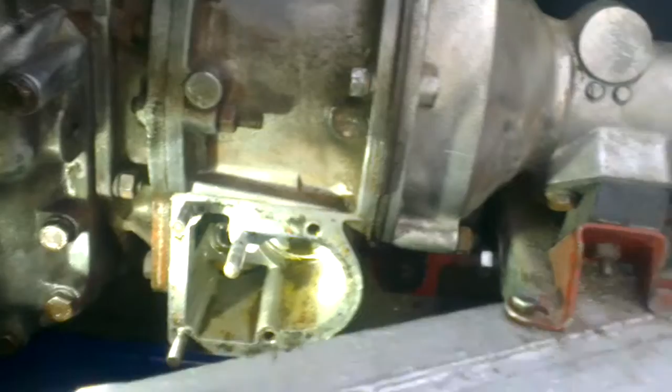This is the gear; the overdrive part is in here and has a planetary gear with one level. The overdrive connects when the fourth gear is engaged, which you can inject with this switch, and if the rotation speed is injected high enough. It is simple but it works.

The overdrive gear operates over a pressure of the two cylinders which are in here. In addition, the gear has an oil pump.

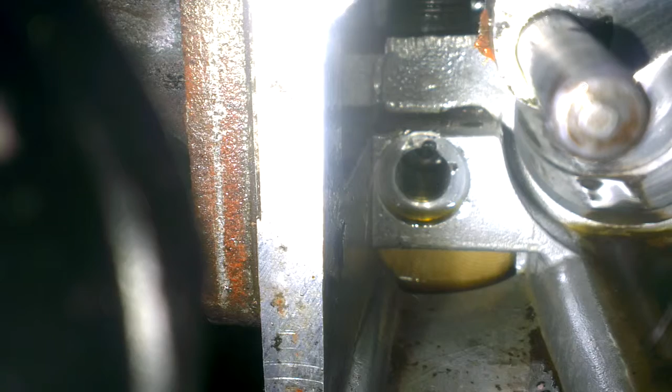If you put a bit of effort in the lighting, you can see that in the back the pump goes up and down. This is a simple stick, a piston in a cylinder, which eventually has an eccentric, which will be driven in the gear over a roller and goes up and down.

Of course, this is energized with oil, and technically the oil is being compressed when it goes down and comes out at this point where the hole is. But there is a canal in which the oil goes further in and will be pushed into the main chamber, and comes out at the main chamber if everything goes right.

The hole at the front is normally tight because of this siphon, which goes in and out by every oil pressure. Because of that, the oil only goes in one direction but doesn't run back.

This is closed over a ball, this here. The ball sits inside and closes the canal. At insertion, the ball will be inserted by a sledge to assure the perfect hold. The oil pushes out the cylinder when it arrives.

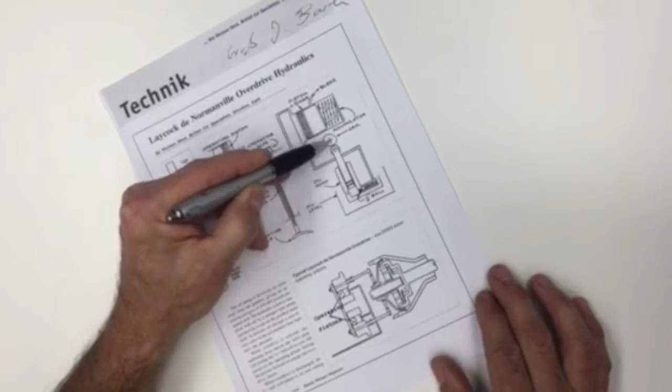These are the detailed parts of the Healey overdrive hydraulics. This is the plunger oil pump, which will be going up and down by the shaft of the gearbox. There is an eccenter and the plunger is going up and down.

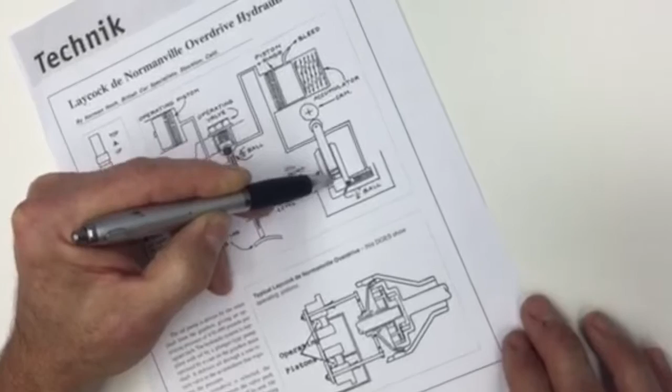At each stroke, this ball will go inside, pressed against the spring, and the oil will go this way to the piston.

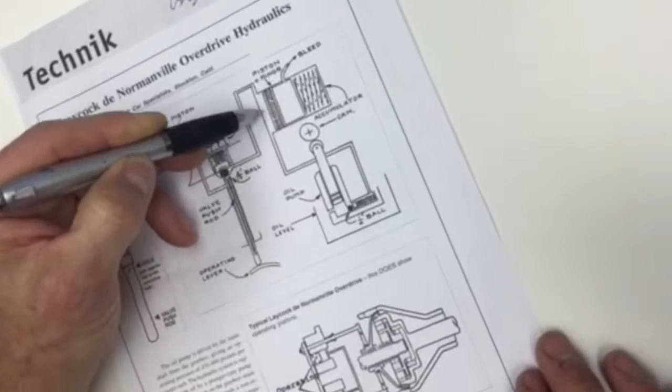And at each stroke, this piston will be compressed against this spring inside of this tank.

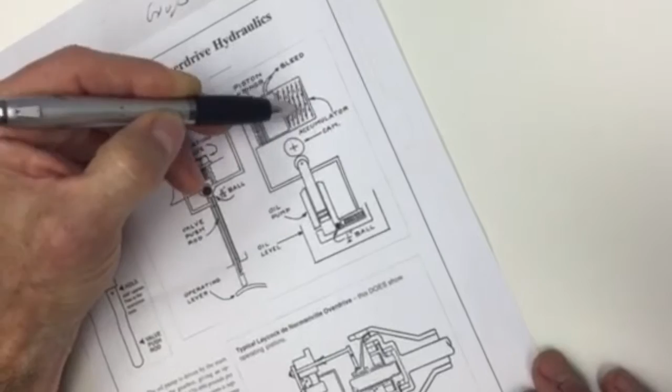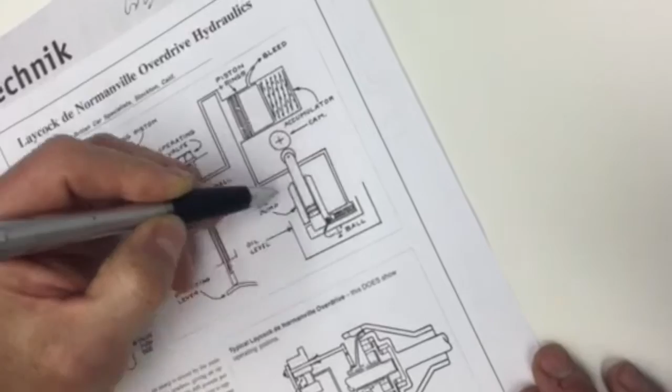If this ball is not fitting well into the seat, the pressure will go out of the tank in the wrong direction. So it is very important to check the seat of the ball.

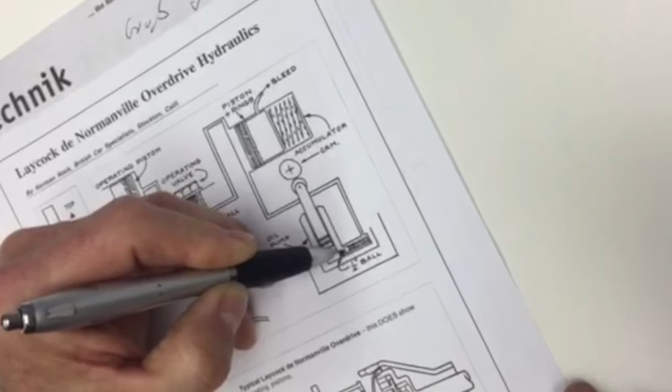The size of the ball is 1/4 inch.

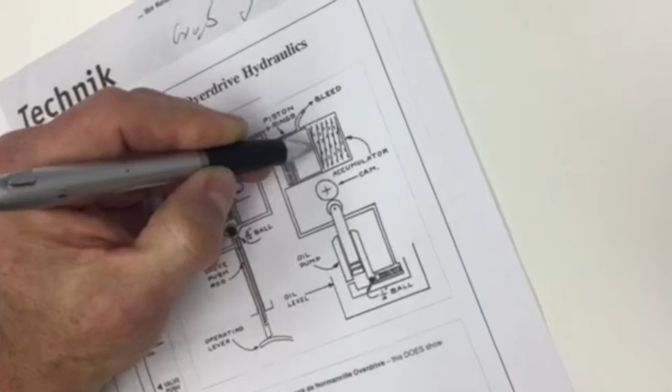The piston then will be compressed against the spring until the final position, and then the oil pressure is very high here inside. If the overdrive will be released, this valve, push rod, will go into a higher position and will be pressed against a spring here.

The diameter of this ball is 1/4 of an inch.

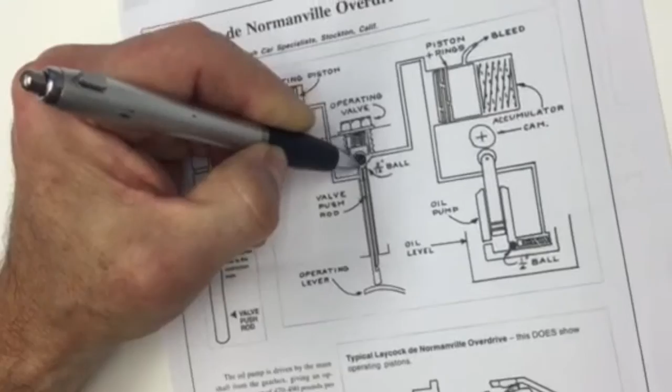And the oil will go through this way to the operating pistons, and the operating pistons are here. This operating piston will stop the annulus of the planet gear.

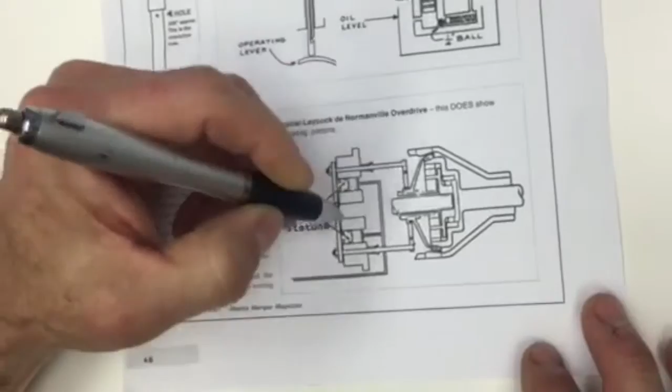If that happens, the fifth gear is released and everything is fine. This is a cylinder, but not the one that goes back and forth — the oil comes exactly to here at the drilling and pushes the cylinder out and to the back.

The cylinder looks like this, but this one is already worn out. In this cylinder is a spring, which will be compressed by this cylinder and builds up a pressure.

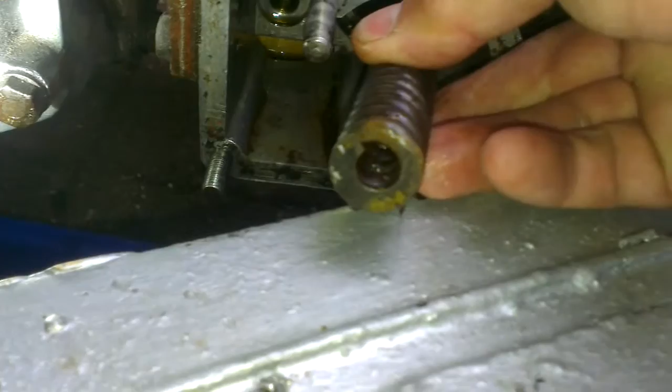Here is the constellation: the spring with a small plug and this stud, which allows the pressure or not because of special drillings. It is electrically driven and goes in and out.

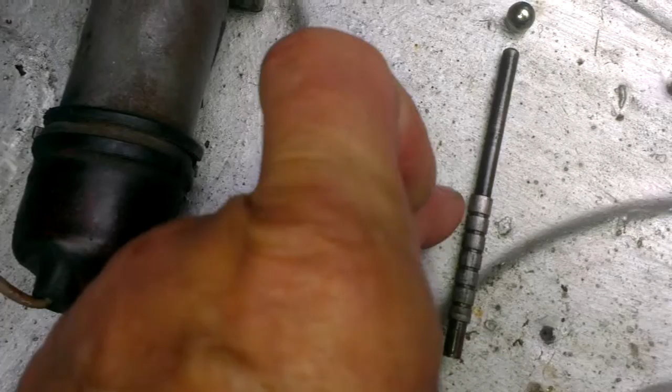After that, it activates this axle here, which goes through to the other side.

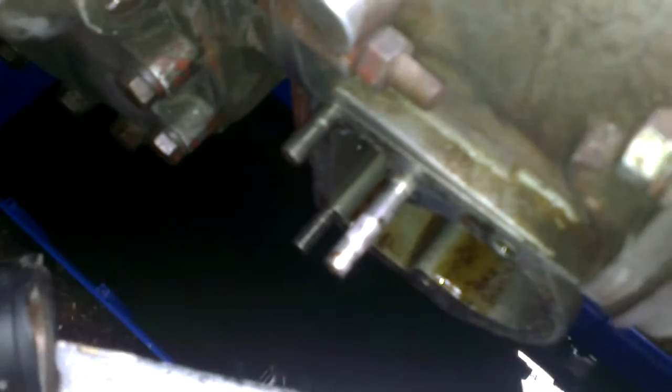And on the other side, it activates a lift at the bottom of the oil pressure release valve. The diameter of this ball is 5/8 of an inch.

At the moment when the valve switches, the oil is being applied so that it pushes the two cylinders, which pull together the brake straps and will so stop the planet gear. The gear reduction is another one, and so the fifth gear is engaged. That is how the overdrive system works.

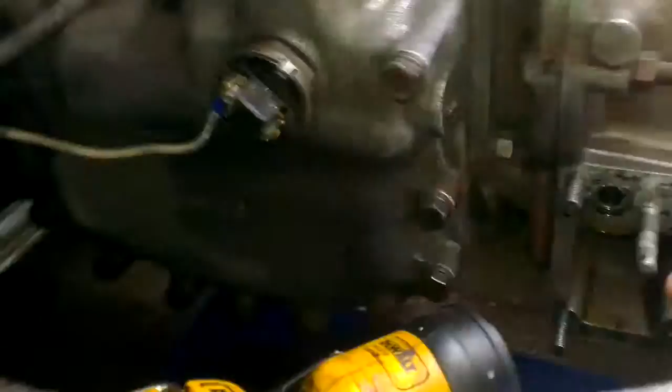The causes of defects are versatile, for example the pump. It can be the issue that the pump doesn't work properly because it is used and worn out. Another problem could be that the oil is too viscous, so it has to be filled in with normal engine oil.

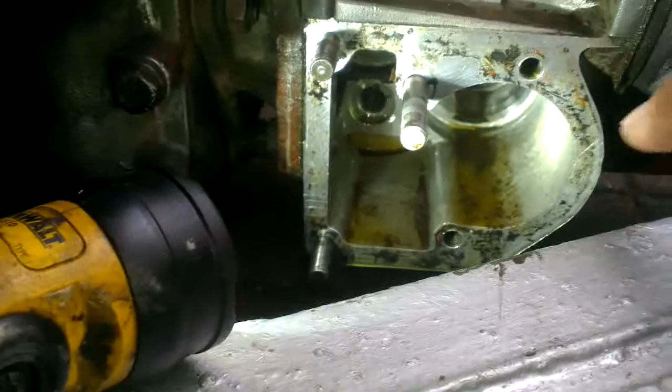Another problem could be that, like here, the cylinder sits steady and permanent in its housing, so there is no movement and no pressure will be built up. You can measure the pressure by attaching a manometer.

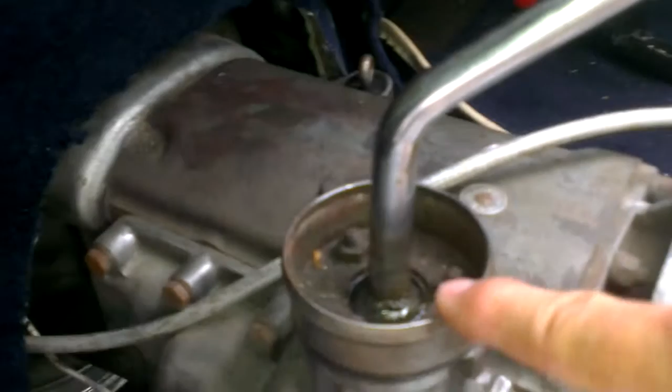It can be that there is water inside. Water often reaches up through this opening; it is practically a water receiver. If you don't cover the opening with some rubber, the water comes through the opening and the oil is going to be a mess.